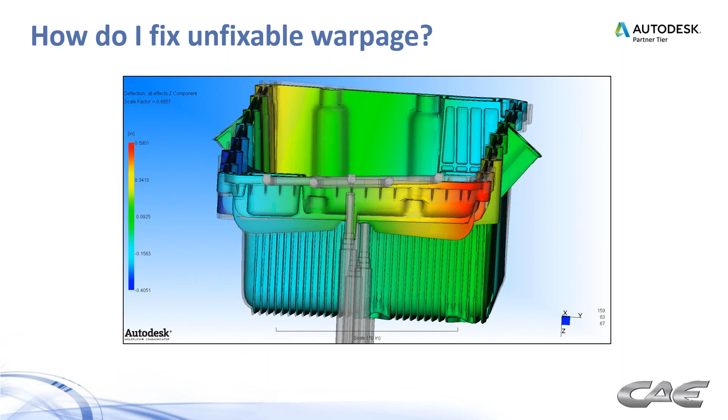So it's all about windage, or some people call it Kentucky windage. It's a process where we bias the tool steel to help reduce or eliminate the warpage. The steel is biased in the opposite direction of the expected warpage. We have to figure out how much to do it.

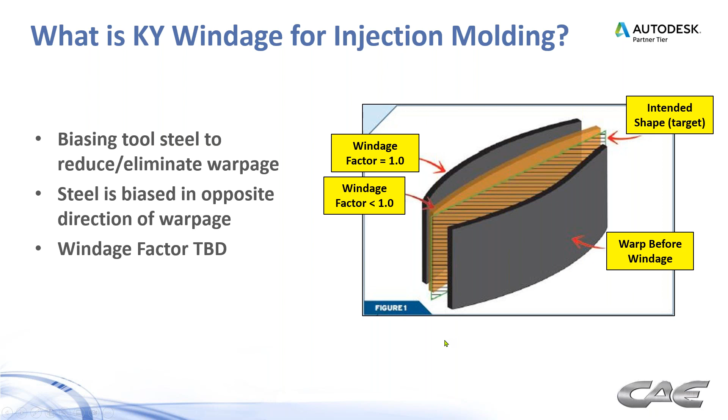That's called the windage factor. Sometimes the windage factor may be 1:1, as you see here, or in this orange shape here, it may be something less than 1, and we'll talk about those cases where maybe it would be less than 1. But we want to hit the target here in the middle. We have to figure out how much we expect it to warp before we can figure out how much windage to put in there.

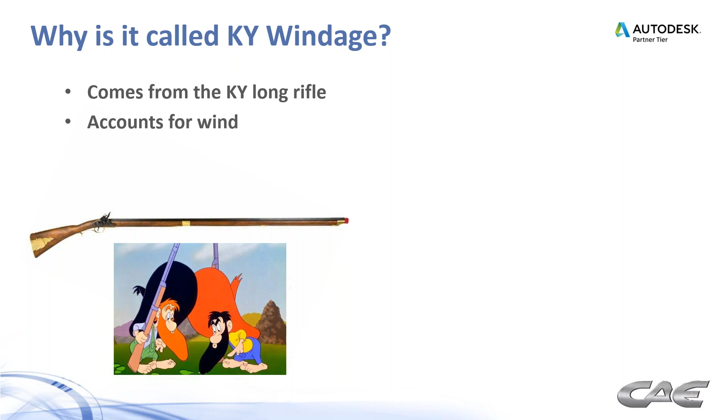So why is it called Kentucky windage? For all you Bugs Bunny fans out there, it comes from the Kentucky long rifle. It accounts for the wind, right? So if you're going to shoot at a target, say 100 meters away, you may aim left or right of the target depending on the wind direction.

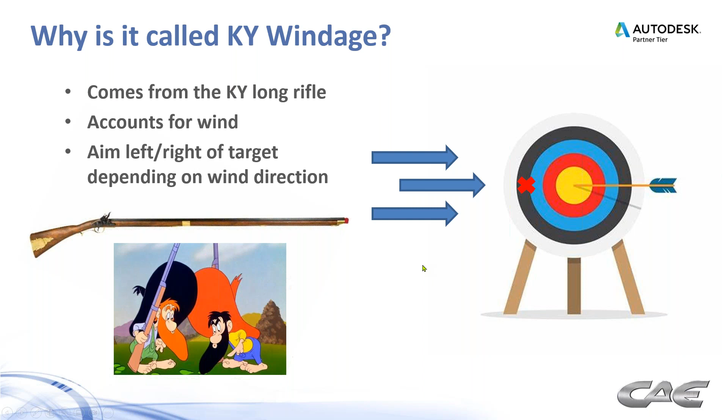So if you want to hit the bullseye in yellow there, you may aim where that X is when the wind is blowing from left to right. That's why they call it windage. And then the Kentucky part again comes from the rifle.

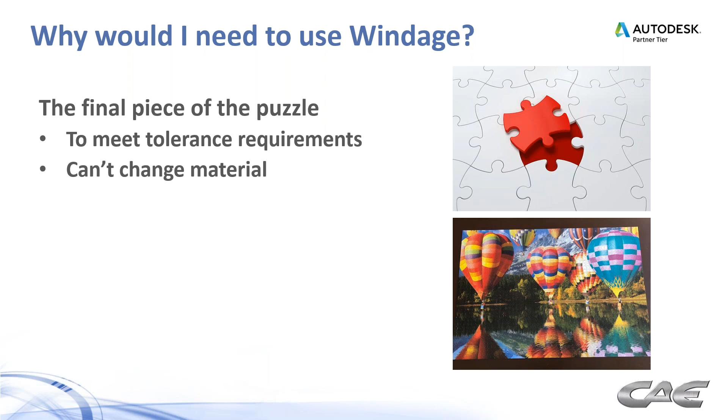So why would you need to use it? I've already kind of mentioned it, but it's really the final piece of the puzzle when it comes to getting parts warp free. So we have to meet tolerance requirements. Maybe we can't change the material. All of our gating and cooling options have been tried.

We can't process out the warpage. And maybe we've tried some part design modifications that haven't worked. We've exhausted all of these things and we still can't get it back to flat. So what do we do?

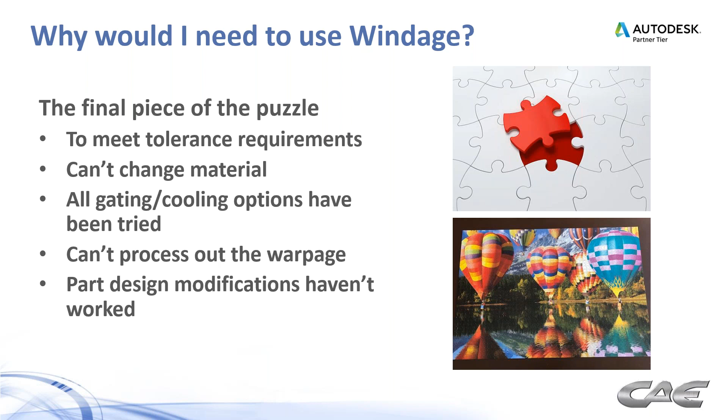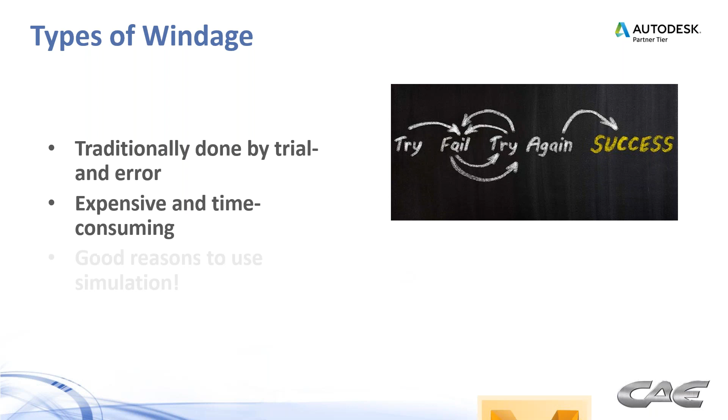And this is the final piece of the puzzle. Windage traditionally was done more by trial and error. You try something, it fails, so you try again, and you go through this endless loop of trying again and failing until you finally get it right. This is a very expensive and time-consuming proposition, and that's a great reason to use simulation, not just for windage, but for anything plastics injection molding related. Problem avoidance is a better situation to be in than having a problem at the press and having to fix it after the fact.

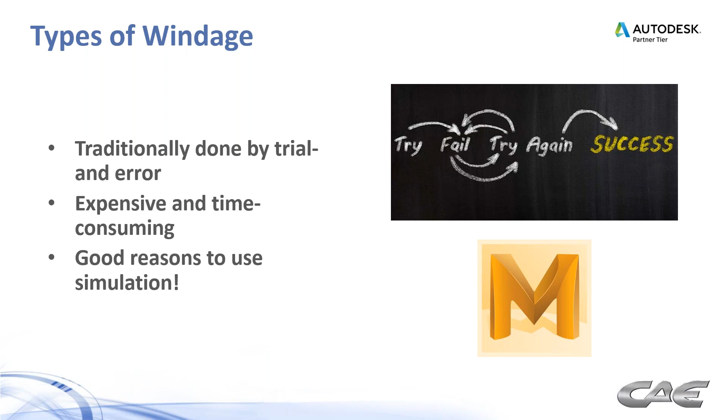Traditionally, the process looks something like this. You design a part, get everything the way you want it, and hand it off to the mold maker. The mold maker designs the mold, machines it, builds it, sends it to tryout, molds some parts, and inspects them, and we find that we're out of tolerance. So now we got to go back to the drawing board, back to design. Maybe we weld up some areas of the mold for windage, remachine things, and we go through this loop time and time again. The more loops that are required, the more time and money that's going to cost.

Seems obvious, so we want to insert the analysis portion into that first loop. If we get into this design phase, we're going to analyze it and see what we're up against before we even get into cutting the first chips on the mold itself. So this is where we want to insert ourselves to make the best use of the analysis.

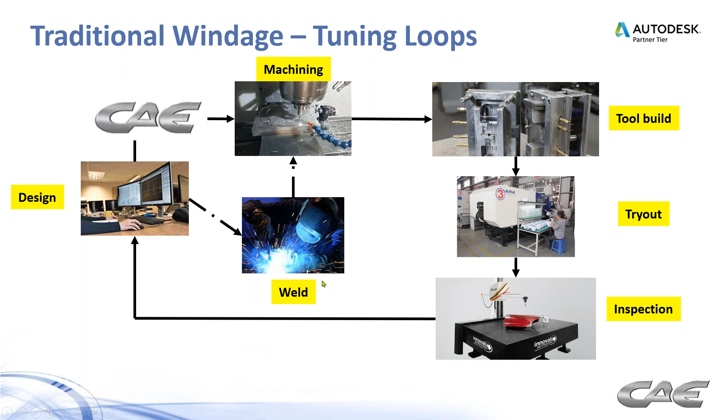So, cost savings breakdown - you've got to justify this. It's got to be worth our while to do analysis compared to doing the traditional windage approach with all these tuning loops. Using that oil pan as an example, the one shown in that first graphic, this is a typical traditional windage loop. You might go through, and for this one, sometimes it's upwards of 10 or 11 loops, but they're used to budgeting something on the order of over $100,000 to do the tuning loops on something like that. You can see the amount of time required to do those tuning loops as well - you're a couple months out before you start getting things right.

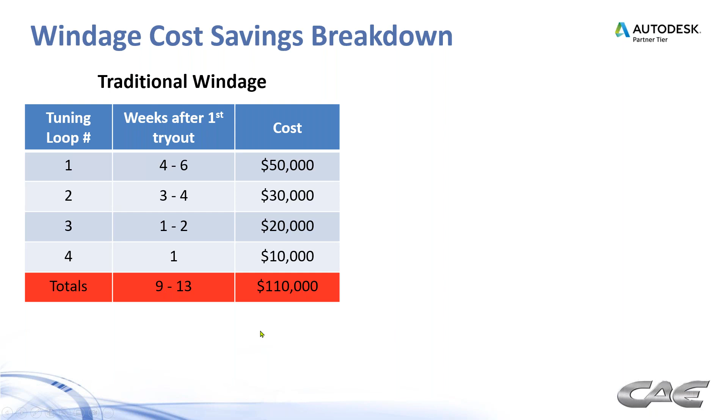Whereas with the Moldflow windage approach, we're going to do a traditional Moldflow analysis, might be 1 to 2 weeks at a cost of $5,000, depending on the part. We do windage and CAD morphing within a week, and there might be one tuning loop after the tryout, and that's the most expensive part of it. So it seems obvious based on these numbers, and these are average numbers we'll call them, that using Moldflow is a good way to approach this.

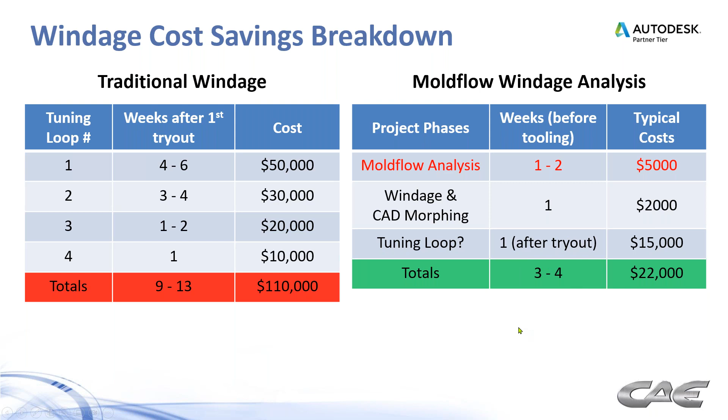So if we're going to do this, when's the best time to start? As is the case with everything Moldflow, starting simulation early during design phase is the best time to do it. When we're in part design phase, not mold design, we have a lot more options at our disposal. We can even try the part design fix before we get into windage, but we need to start simulation early to see what we're up against.

And after all those simulation options have been exhausted, and we still have warpage, that's the time to start thinking about windage. It's okay to do it early, because even if we don't have a full mold design at that point, the windage factor that we would come up with is likely to be similar for the final design once we do have the final runners, manifold, cooling, etc. in there. So finalize the tooling early and get that all in there, and then determine the windage factor.

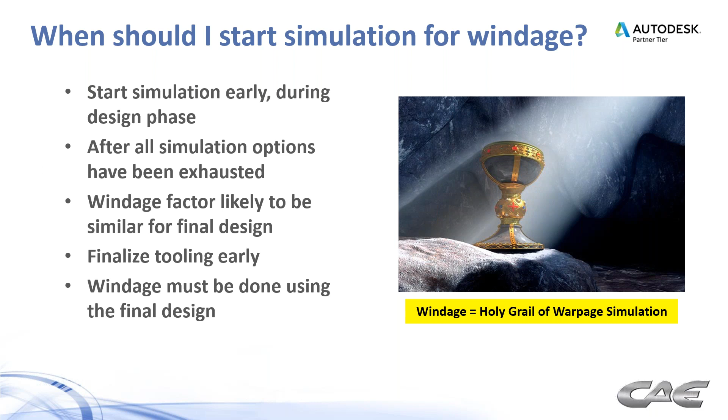But I can't stress this enough that even though you're doing some windage analysis early on before we have a final tool design, the final windage shape has to be done with the final tool design. Cooling, gate shapes, sizes, final locations, manifold bore sizes - all of those things are going to play into how the processing works out, and the final nitty-gritty detail of how much this is going to warp and in which areas needs to be taken into consideration. So we have to have the final tool design in there.

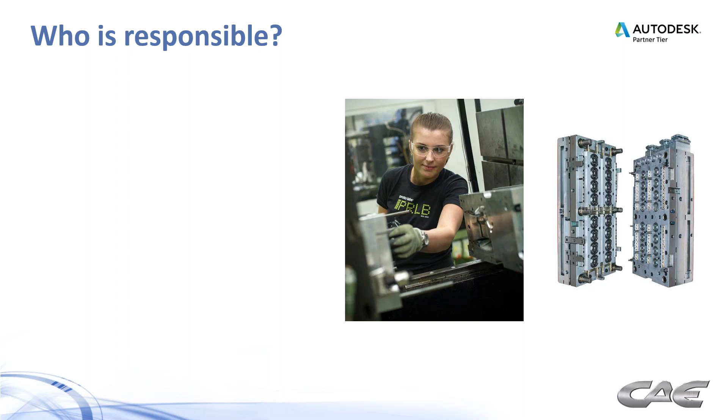So then the question becomes, who's responsible for this? Who's going to do the CAD morphing, for example? We've been doing windage analysis for on the order of 15 years now, but the question always became, who's gonna morph the CAD?

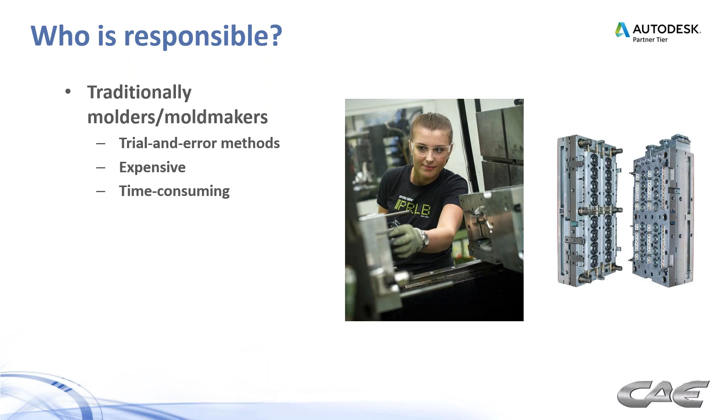Traditionally, the molders and the mold makers would take care of that responsibility. If we weren't using Moldflow, they'd use trial and error methods for putting windage in the mold. And as we already said, it's expensive and time consuming, and those tended to be more spot corrections, maybe just on the parting line or so forth.

But now when we do it through simulation, the expert Moldflow analysts are going to handle the analysis part, and the CAD morphing part is done with experienced folks with lots of tooling background. So the marriage between the Moldflow analysts and the folks with the experience to morph a part, twist it and turn it, considering all the tooling aspects of the part design.

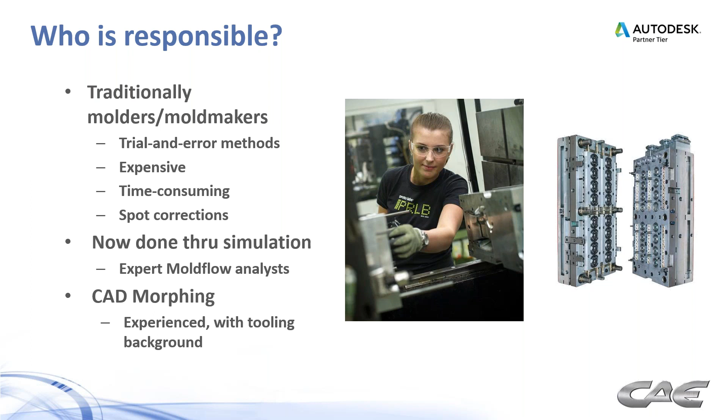That's the best combination, so we are now doing that in-house. We've been doing it for several years now, and that's great because we have a direct line of communication between the analyst and the person doing the morphing of the CAD.

So what are the main steps to a successful windage project? First thing we're going to do is make sure the part is feased, and I'll go through each of these individual items one by one in more detail. We're going to eliminate as much warpage as we possibly can through traditional means, determine the windage factor along with a shrinkage factor, morph the CAD, and then perform windage checks.

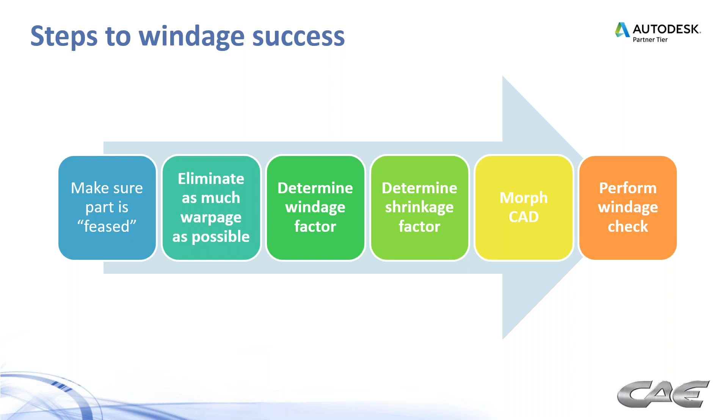So step one is making sure the part is feased. Feasibility study, or DFM, design for manufacturing, assures several things. We got to make sure the part is good for tooling. Doesn't make sense to do all this analysis work if we've designed a part that can't even be tooled.

We need to make sure we have sufficient sidewall draft, good rib to wall ratios, proper fit and function. Basic die draw and die pull directions need to be identified. All these things go into making sure we have a sound part design that is feasible for tooling.

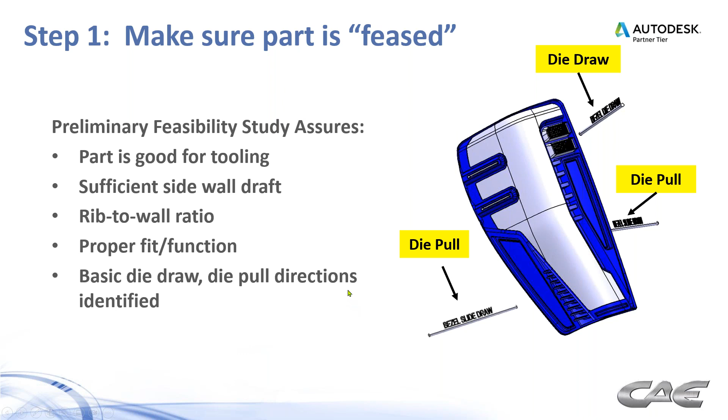And a lot of glaring design mistakes can be identified in this step as well, so get that out of the way before we even get to the Moldflow side of things.

Once we're there and we're doing Moldflow analysis, we're going to eliminate as much warpage as possible. I've addressed how to do this in other webinars in the past, but just as a refresher, we're going to dip into 5 areas: mold design, gating, cooling, things like that, part design, material, process settings, and of course our simulation expertise.

What kinds of design changes do we need to make? Where among these other 4 areas do we need to dip into most to reduce the warpage as much as we can? Part modification, material, etc.

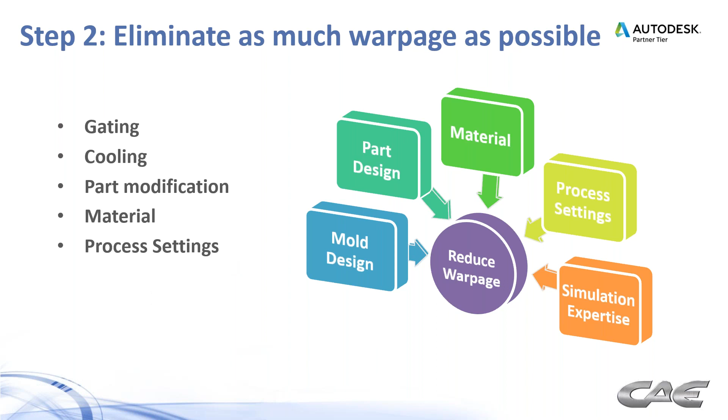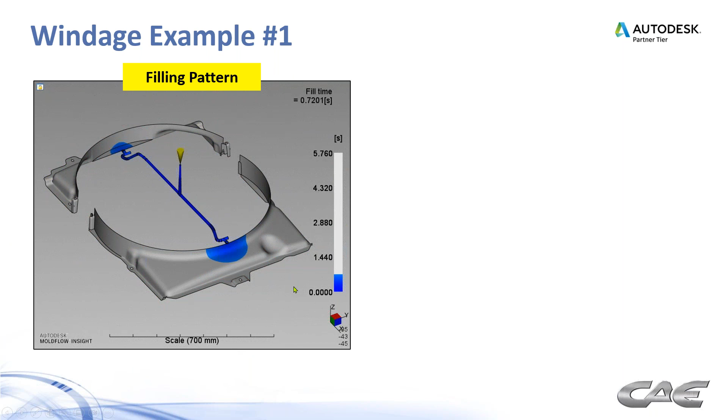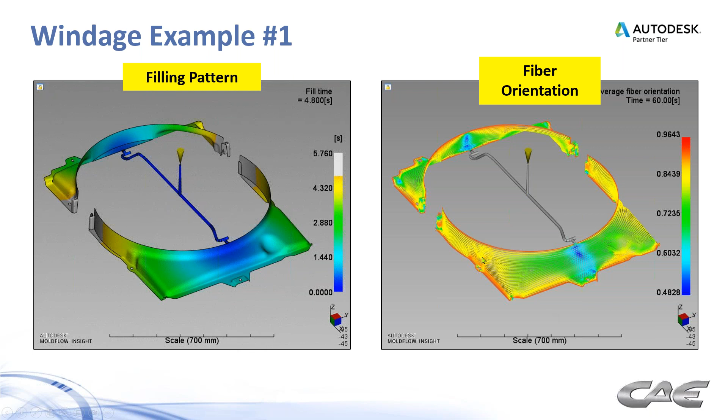So here's an example where we dipped into the mold design. This is a 1+1 family mold, 2 parts that come together to make a fan shroud. Traditionally, the larger of these 2 was made using 3 gates. Because it's a fiber-filled material, we decided to go against that and just do 1 gate so we could make the fiber orientation a little more uniform, and that helped us reduce the amount of warpage in these legs quite a bit compared to a 3-gate design, so that there wouldn't need to be as much windage put into that.

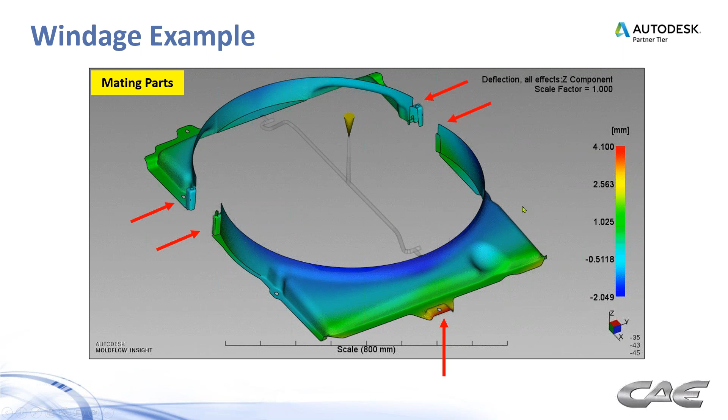And you can see the expected warped shape of that part. There's a fair amount of warpage, 4 millimeters vertically, and then you can see the legs of each of these parts coming inward as well in the Y direction.

Okay, and once we have that appropriate windage factor dialed in, then we're good to go. So the windage model warps back to the nominal. This is all in analysis, all in Moldflow world right at this point. That's the windage check.

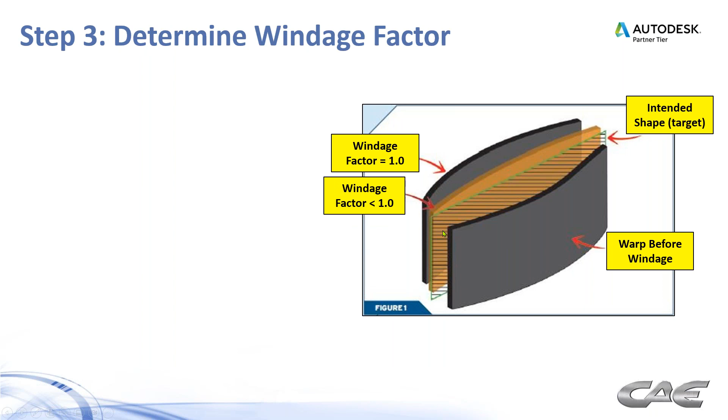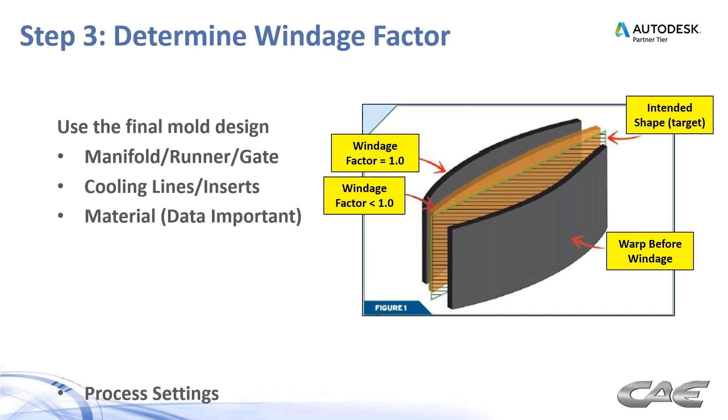Okay, so now that's part of determining the windage factor. We will use the final mold design. We got to get the manifold, the runner and gate in there, cooling lines, any cooling inserts. Obviously, we need to make sure we have good material data and get our process settings dialed in to determine that windage factor.

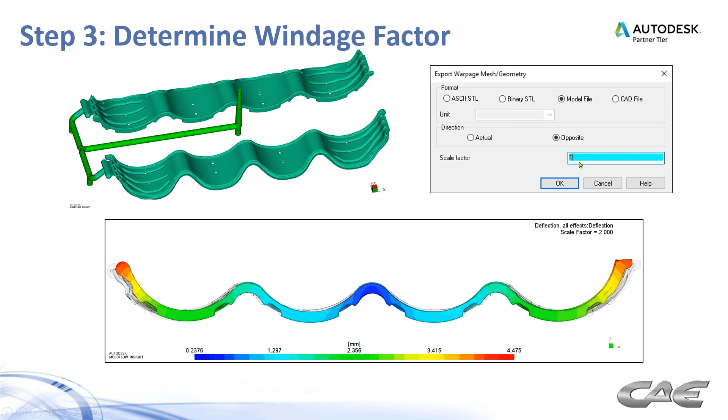Another way to look at a windage check is to kind of do overlays. So we're gonna take this model, predict the warpage, and export it in its opposite direction. Our starting point is going to be a scale factor of 1. So we take this warp shape and warp it in the opposite direction.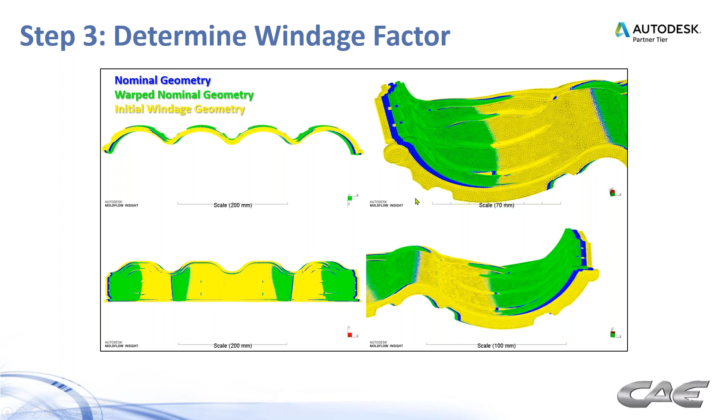So two things happening there, you see it getting smaller and you see it warping inward as well in the green there. So we take that, and like I said, we put this in the opposite direction, and that opposite direction mesh is what we see in yellow here. Okay, so it's bigger, which is what we would do normally, right? We would expand the part to account for shrinkage, but it's also warped downward, so it wants to warp inward and shrink inward simultaneously. So we have those two effects going on, and it's being accounted for in the biased shape, the outward bias shape in yellow there.

In this case, it was 1-to-1. Sometimes it's going to be something less than that. Sometimes even it might be a little bit more than that. But we have to do this windage check and do this overlay to see how close we can expect to be. Keep in mind though, we're still in Moldflow world right now. We haven't done anything with the CAD yet.

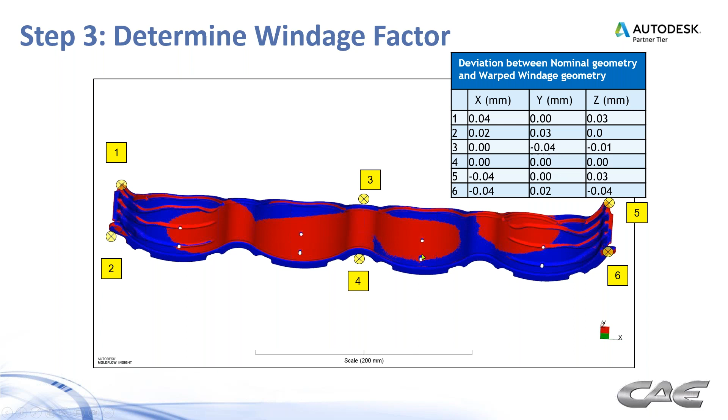Another way to do it is to use overlay programs like inspection programs. When you do 3D scans of parts, you can overlay the Moldflow mesh from the windage check model with the intended shape and see how close you are in all these different areas of the part. So if everything comes out close to 0, you've dialed in the right windage factor.

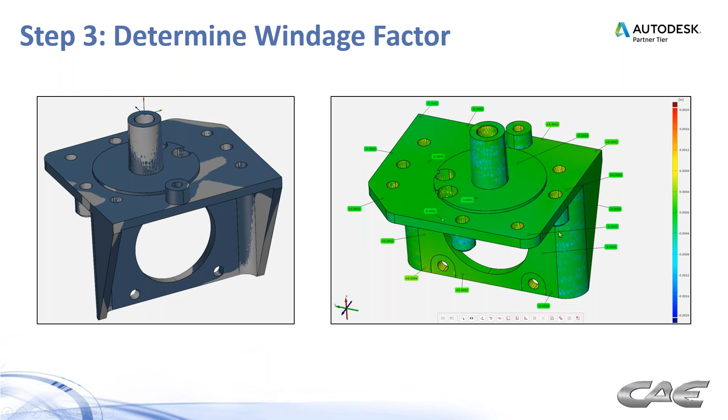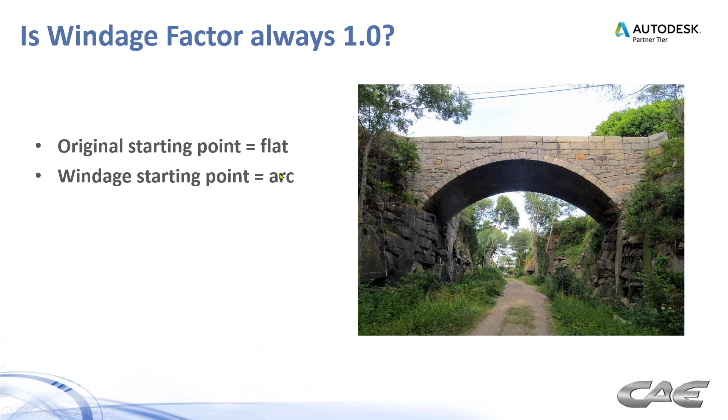But is the windage factor always going to be 1-to-1? Not always. I'd say most of the time that's about where we are, but many times we're something less than that. And the reason is this, and I put the graphic of this nice archway here up for effect. Our original starting point in Moldflow is essentially a flat part, our intended shape. But when we morph it back to the opposite of the warped shape, oftentimes we're creating an arc in the part. And as we know from architecture, an arc shape is stiffer than a flat shape.

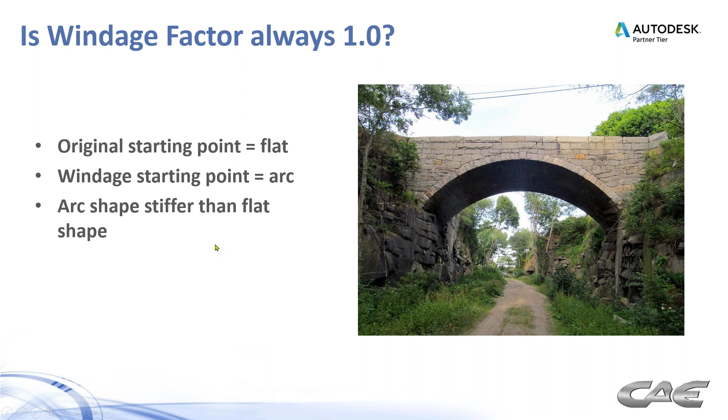So it wants to resist that warpage that we predicted, and it might come short of where we want it to be, the intended shape. So it's not uncommon to see windage factors be in the 0.8, 0.9 area. It's not that common, but it is common enough to where we have to do this check to make sure that we don't just expect it to be a 1-to-1.

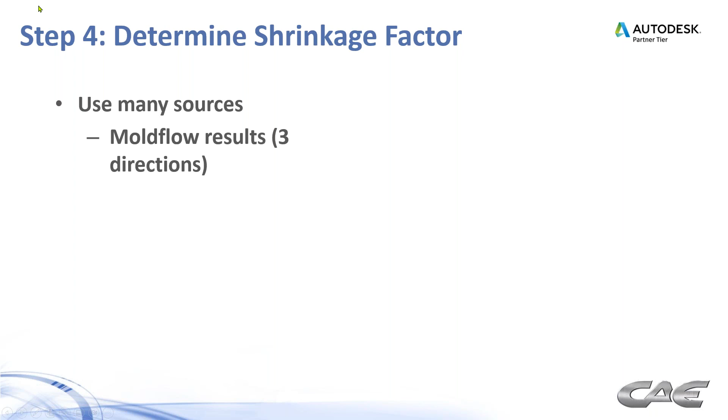Along with the shape of the part, we have to determine the right size of the part, and we have to use a lot of different sources to do that. We have Moldflow results where it will give you shrinkage factors, linear shrinkage factors in 3 directions. We have the Moldflow material deck, so well-characterized materials come with a wealth of shrinkage information generated over a lot of different conditions, different sets of process conditions, different wall thicknesses, and so forth.

Material directions, fiber orientation. If it's a fiber-filled material, there's different shrinkage in different directions based on fiber orientation, molecular orientation for unfilled materials, etc. So well-characterized materials in Moldflow will give different shrinkage values for different conditions. We also have, of course, the material supplier to rely on for their published shrinkage data.

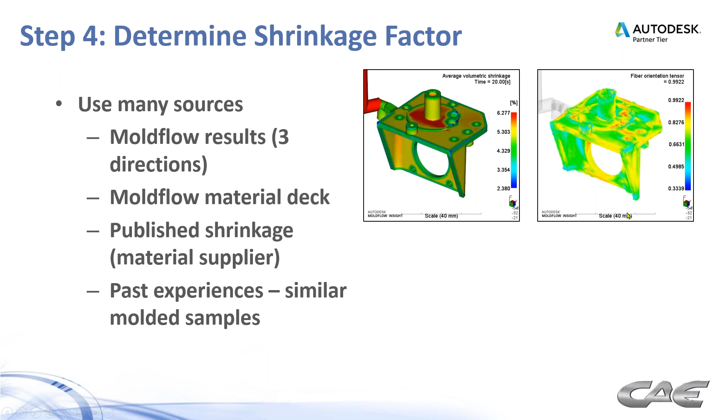And again, we're going to use all these sources to help us do that. You can see in this case, we've got a gate here. This is a fiber filled material. The predominant direction of those fibers is across the part in the direction of flow. And then when we go down the leg of the part here, it's going to be downward for the most part in that leg. So we're going to have different shrinkage values in different directions, and that's exactly what showed up here when we picked different directions to measure that shrinkage.

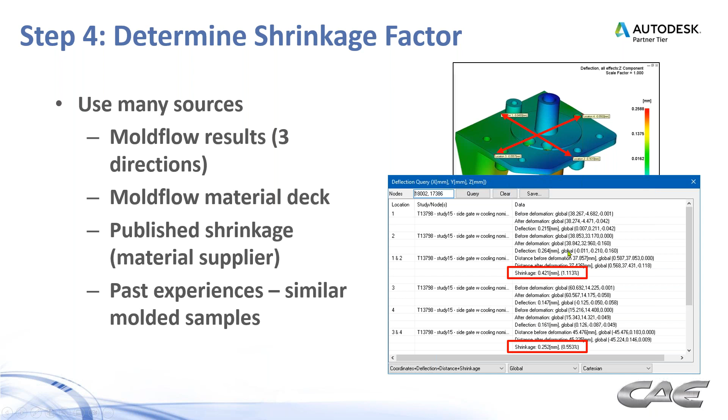Okay, so there's another area of Moldflow that we can look, and it'll give you composite shrinkage values in each of the three directions, and you can see how that played out here in X, Y, and Z. A lot of different ways we have to do this, but the big point here is that we have to pay attention to that, because we have to have a starting point when we get into the CAD morphing.

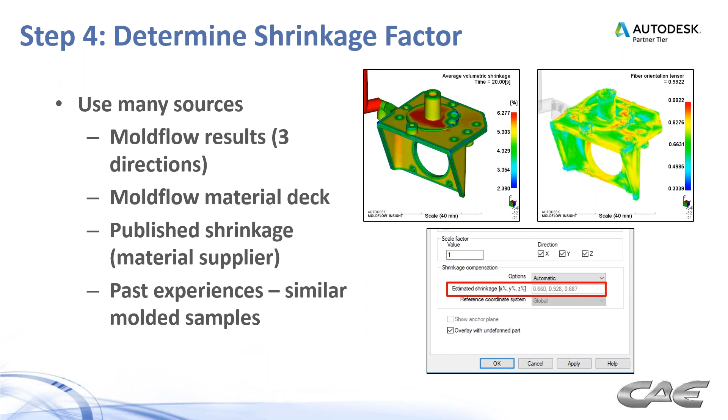We also have to pay attention to material data. Good material data, I've hammered on this thousands of times before, is essential to good Moldflow analysis. But nowhere is it more essential to analysis than when you get into windage, because windage is that extra step. We're trying to dial this in, and the less you pay attention to shrinkage, or material data rather, the more that error propagates throughout your part. And when you get into windage, too many accumulated errors is going to do you in.

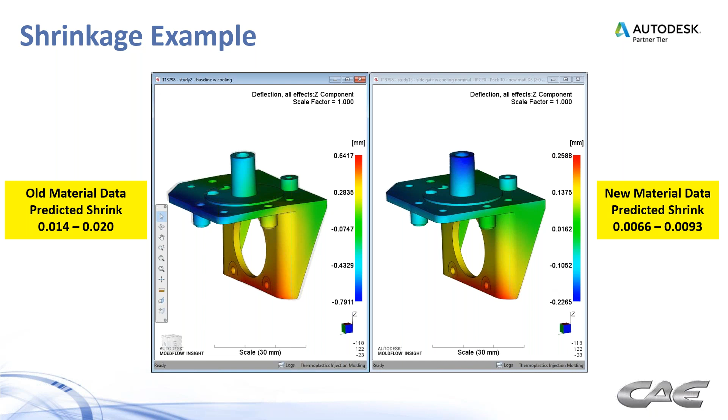So the material data was regenerated, and we got things right in that case. We were able to use that new material data to generate a much better windage file from that. So when we ended up doing the windage on that, we came up with really nice flat parts.

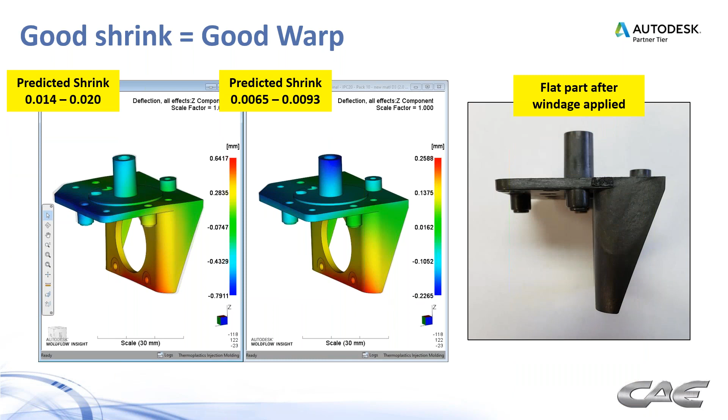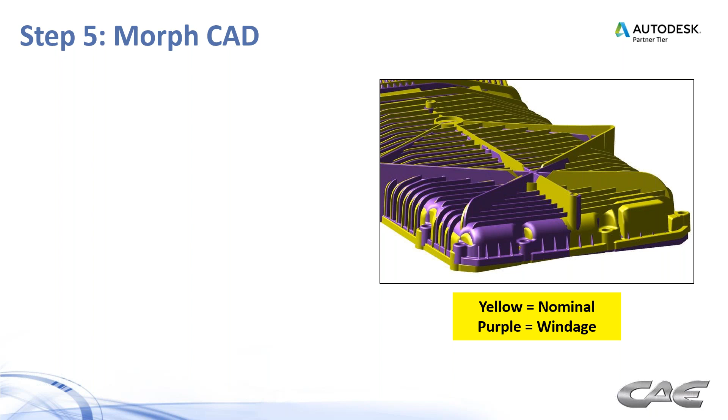Okay, so we're at that stage now where we know the windage factor, and how much shrinkage we want to apply in the different directions for the mold. Now we actually have to make a file that the mold maker can use to cut steel. So that's where the CAD morphing comes in, and this can be the touchiest area of windage.

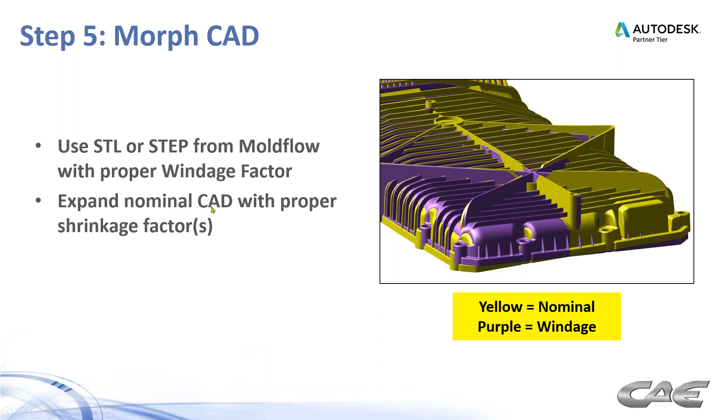We're going to take something out of Moldflow, either in STL or step format, and that file is going to have the proper windage factor in it. We're going to expand that file, or expand the nominal CAD file, with the proper shrinkage factors that we just discussed on the previous slides.

We're going to protect features for die draw. That's important, right? We can't have any die lock conditions. And we're going to morph to match that windage shape that we had in this STL or step file.

It's not going to be a perfect match to the STL or step file, because we have to protect these features for die draw, and also because that Moldflow model is going to have millions of different shrinkage factors all across the part, in their exact locations. We're not going to put all those individual little shrinkage values into our morph CAD model. We're going to apply more averages across each of the 3 directions, X, Y, and Z.

So here's the example over here. In yellow, we have the nominal - that's where we want things to end up. In purple, we have the windage file. We had to twist this thing 15 millimeters.

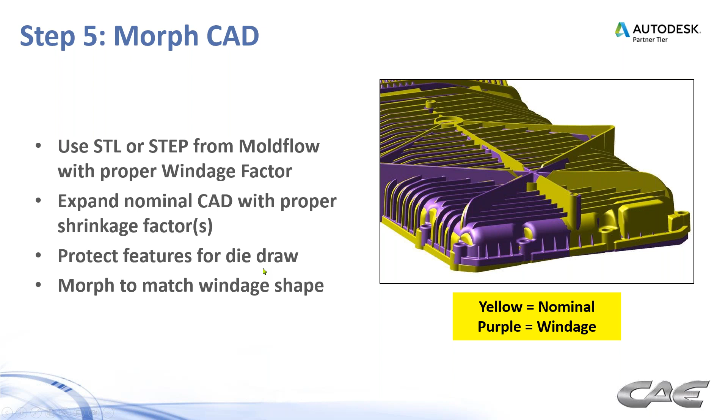So what do we mean by protecting for die draw, right? Let's say we have a rib designed into the part, and you can see in this file right here, millions of ribs. That was quite the undertaking to keep all these ribs in die draw. But let's focus on one rib here on a flat part, up and down, with a little bit of draft on it.

Now in our windage model, we've got the deck of this part starting to slant in one direction, and the rib goes along with it. Well, now all of a sudden we've got this area right here in danger, right? We've got a die lock condition. We can't have that.

So we can do one of 2 things. We can correct the rib draft, which is okay, but there's a lot of work in that, and you can run into 2 problems. You could have a thicker base, which opens you up to more sink potential, or you can draft in the other direction and make the tip of the rib thinner, which might open you up to issues with filling that rib out.

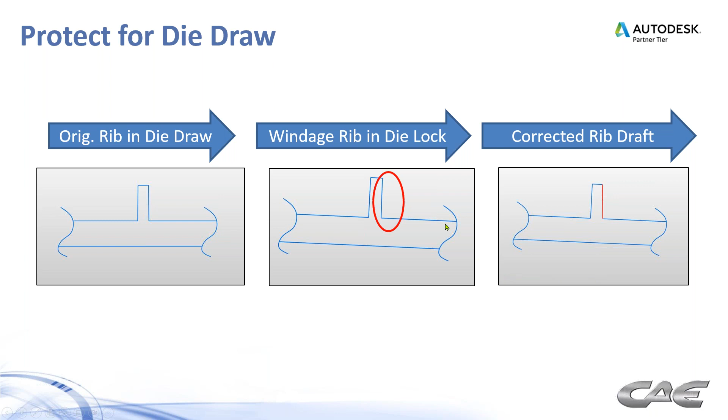So I don't really like going in that direction. You can do it - it's a little bit more work, obviously, with CAD modeling as well - but that's not a preferred way. But just to illustrate the point, that's what we have to do, essentially remove that die lock condition. So another option is to leave the features in die draw.

So this is still straight up and down, but the wall that it attached to has been morphed into the windage shape.

That's our preferred way. And sometimes you can get into situations where, when this warps back to flat, right, that might leave a little bit of a slant in the rib. So we have to make sure that we're paying attention to the fit and function of those features when we're doing this.

Here's what it looks like on a 3D mesh. Again, we're going to morph within the die draw and die pull directions. In blue here, we have the final morph data. The Moldflow windage shows that this leg is cocked to the side quite a bit, so we had to stand that one straight up to match it better.

Again, we're going to focus on the fit and function in the critical areas - things like bosses, locating features, ribs, trim edges, overall sizes, things like that. Some critical areas we may leave stock safe. In other words, we want to be double, triple sure that things like locating features or whatever have a little bit of leeway to dial those in more precisely in the end. So we'll leave those stock safe to have the freedom to do that at the end.

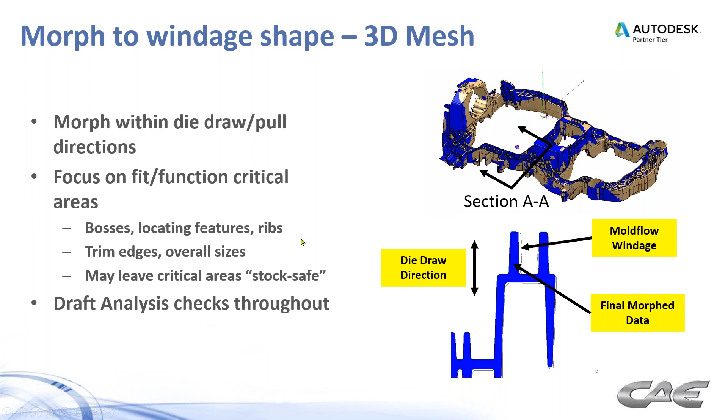And of course, throughout the morphing, we're going to be doing draft analysis checks. So that's a 3D mesh. We're big proponents of using midplane models here at CAE Services. We feel like those, in the right situations, give us the most accurate warpage results, and the most accurate warpage results are necessary to get the best windage models.

So we have to make sure we have CRIMS data. I won't go into detail, but that is the shrinkage data I was referring to earlier.

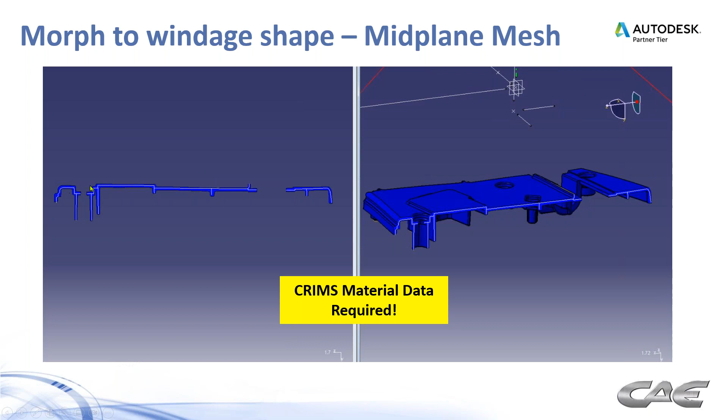CRIMS data gives us all of that shrinkage information over a wide range of different process settings and so forth. So we overlay the midplane windage model with the CAD, and we start tweaking surfaces until we match that as best we can.

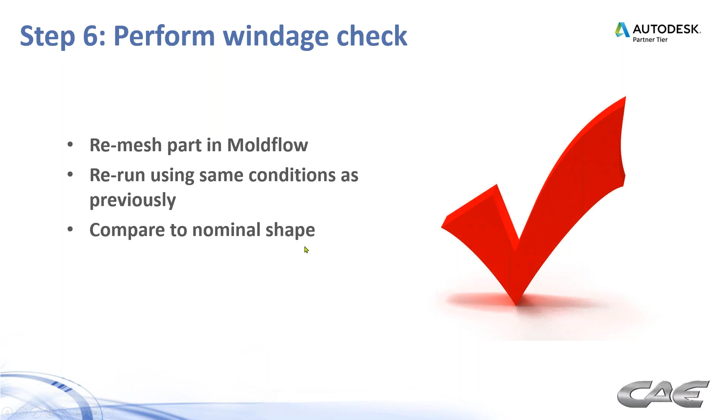Again, keeping features in die draw and fit and function in mind. So it's never going to match up perfectly to the windage model in Moldflow, but it doesn't necessarily need to. After we morph the CAD, we've got to go back to Moldflow. We have now a different shape in our CAD than what we used from Moldflow, because we've protected for die draw, and we have to see what those effects are on the final shape. So we're going to rerun using all the same conditions, gating, runners, cooling, process settings, and so forth, and compare the results to the nominal shape to see if we're still okay. In some cases, protecting for die draw is going to change our part pretty significantly, especially the more ribbing we have, the more that tends to become necessary. So we're going to adjust things, tweak them until we get that windage check to pan out for us.

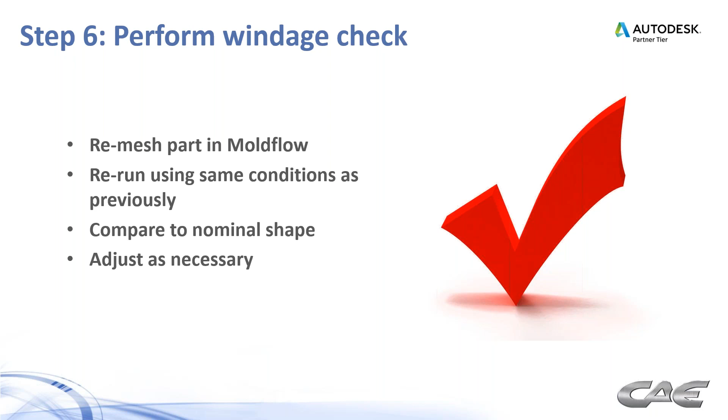So this is a comparison of the two windage check models. This is what you saw earlier, done in the Moldflow world. This is the result of the windage model and the final windage check of that morphed CAD model. You can see there's some numbers that are a little bit more out than they were previously, but they're still within tolerance.

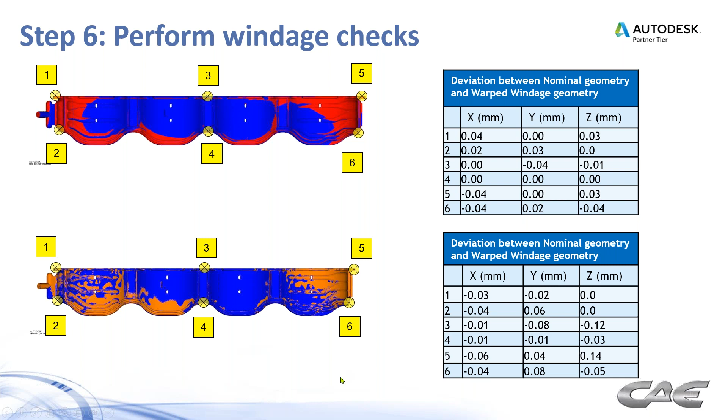Here's what it looks like when you use an overlay program. You can see actually in this case, there was a slide that forms this, and they decided they didn't want to modify that slide with windage as well. That was going to cause some additional time and money to do that, so they were okay with these still coming in. That's why those two sides did not check out after we scanned parts and overlaid them with the nominal. But the rest of the part came in pretty darn tight.

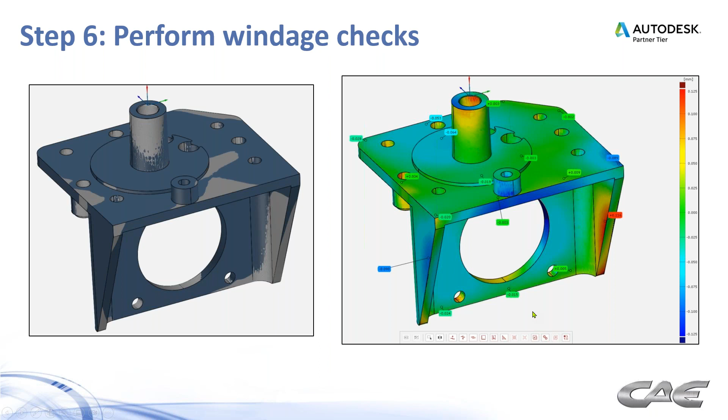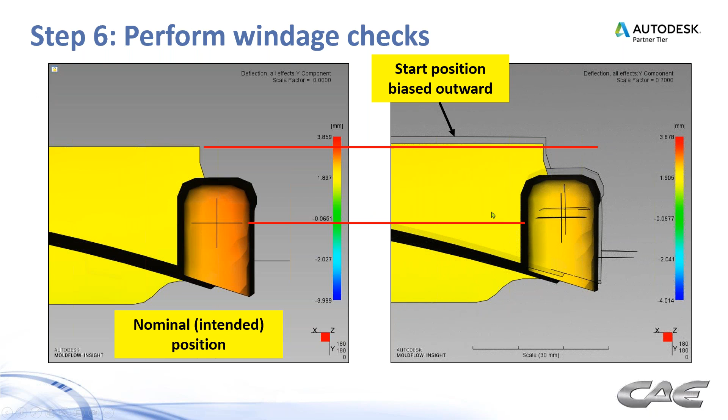And then again, back to this. So once we created the windage CAD model and remeshed it in Moldflow, we still got to check to make sure things come back to the nominal position.

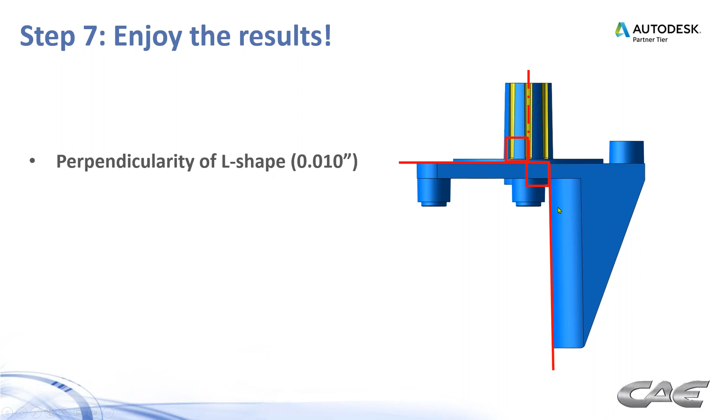So after all said and done, enjoy the results. In this case, we had two major conditions of perpendicularity of this boss and of this L shape. So measured parts on a CMM in this case, perpendicularity of the boss came in all well within tolerance. Here's a couple other examples.

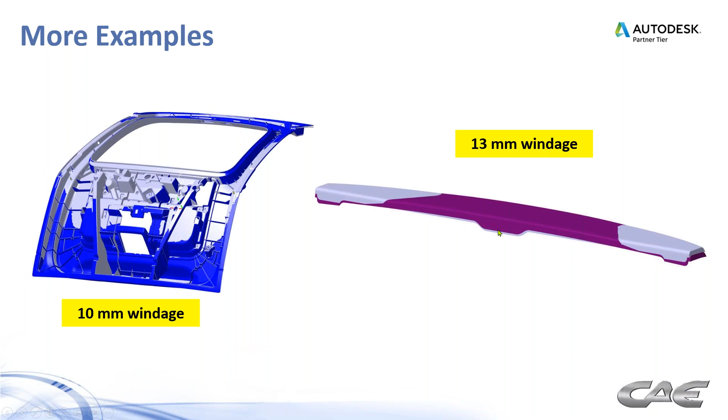10 millimeters of windage, the windage model's in blue. You see the separation between the nominal and the windage model. This was a case where we put 13 millimeters of windage in the purple model there, and then our tooling engineer attended this tryout and said it came out bang on in the mold tryout. So just some basic examples of what's possible. Very complex parts, parts with a fair amount of windage in them, even though the geometry itself is relatively simple. So all kinds of different parts.

So the next part is the fun part, right? We got to manage expectations, the difference between perfection and predictive. And this isn't just windage, it's everything Moldflow. The expectation should not really be 100% perfection. The expectation in this case should be the reduction of tuning loops. Ultimately, you're going to get to a flatter part. The question is how fast you're going to do it and how much time and money you're going to spend to do it, right?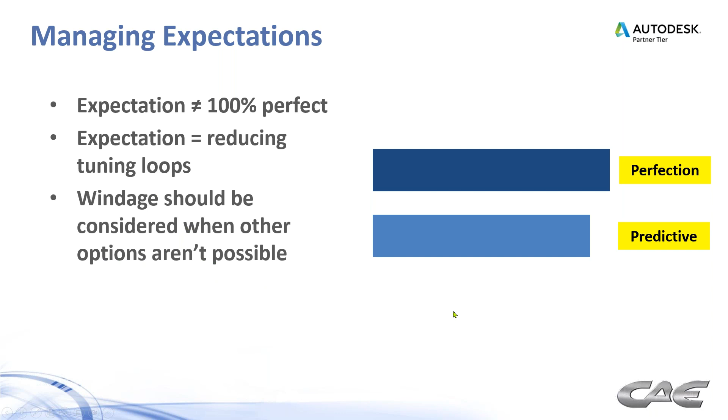Windage should be considered when other options aren't possible. We went through that list earlier. And I would argue that there's no better way to do this than through the use of Moldflow. But you got to make sure you're doing everything right. You shouldn't enter into windage lightly when you're using Moldflow to do it, because of what I said earlier. Those errors, any error in any of the variables that we deal with in Moldflow, and there's a million of them, any uncertainty in any of those compound, right? It's a snowball effect. You introduce error into the process, the material properties, the tool design, the part design, any of those areas where there's uncertainty, those are going to compound. So got to make sure we're doing it the right way.

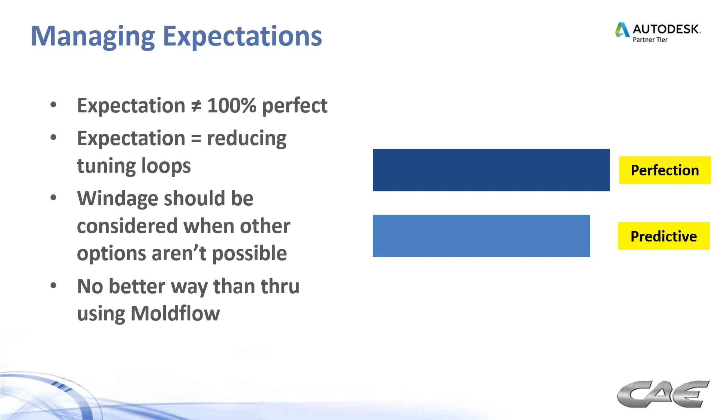This particular part, by the way, I said there was 15 millimeters of twist in it. Came out dead flat around the periphery of the bottom of the part here. There was still one tuning loop that was required, and this is where protecting for those features, being steel safe, came in handy. So some of these mounting bosses needed to be dialed in laterally with one more tuning loop. But heck of a lot better than going through 10 or 11 of them.

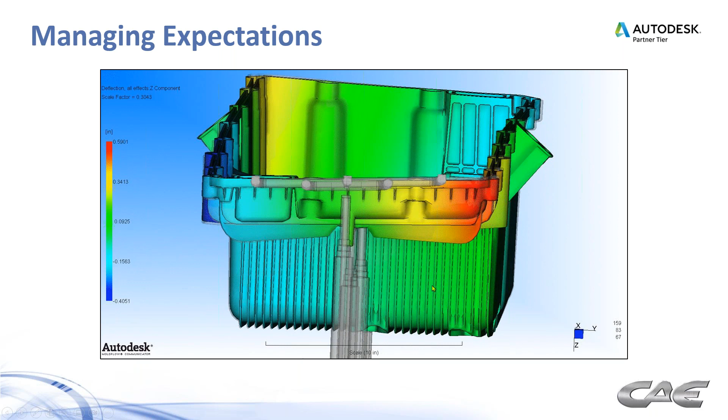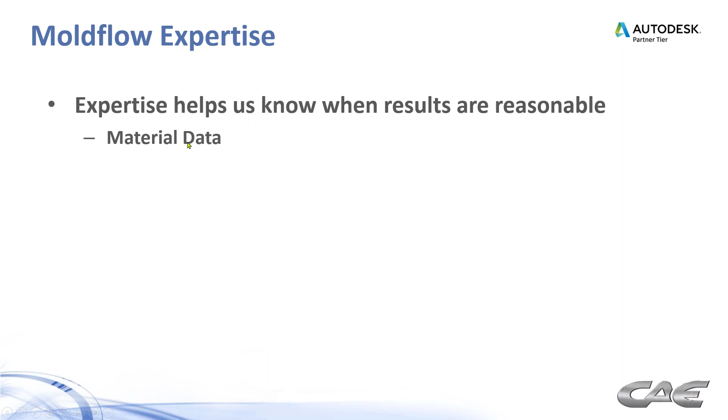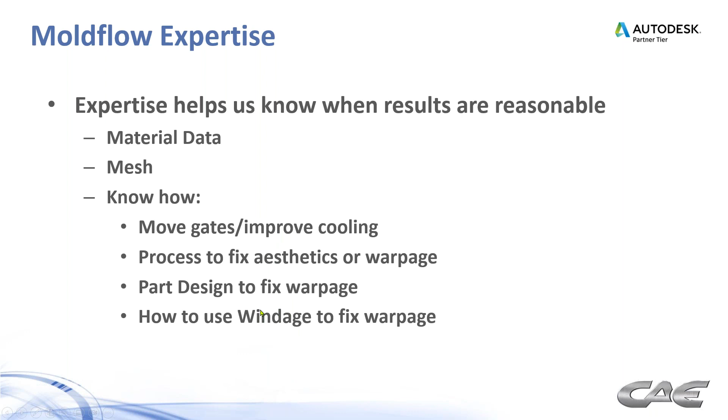And I mentioned the Moldflow expertise. That expertise helps us know when the results are reasonable, whether it's material data or the mesh, the know-how of moving gates or improving cooling, how to process to fix aesthetics or warpage, how to use part design to help fix warpage, how to use windage to fix warpage. All of these things come into play. We want to avoid windage as much as we can, but once we get to that point, we better make sure we're minding our P's and Q's when doing our analysis work.

Okay, so that's the windage aspect of things. In a minute, we're going to open up the phones here, so to speak, to the field to allow you to ask questions. It'll be a live question and answer session.

But in the meantime, let's talk about what's happening here at CAE. I talked about the Autodesk partnership - we've been Autodesk partners for going on 5 years now. We're tasked with software sales, Moldflow software sales, training and mentoring. I'm our lead trainer when it comes to learning the software. If you want to learn more about Moldflow itself, we can always schedule a day to spend some time demoing the software. From a learning aspect, we're building expert analysts.